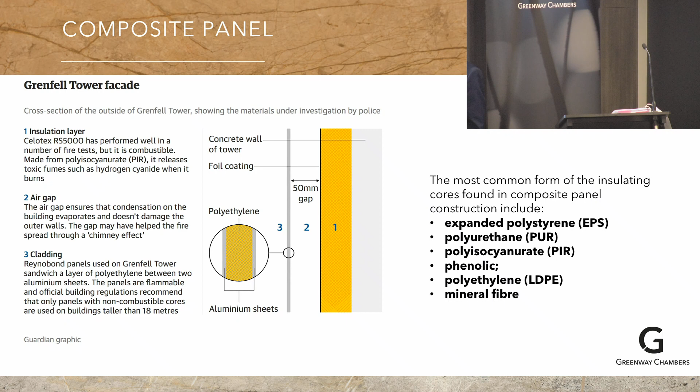And so the sandwich panel is this bit, has the two sheets, and inside you have the insulation or filler, which can be any of this. That's probably not combustible. I say probably for a reason I'll explain, but the rest of them, probably in order, are very combustible. And the combustion, polystyrene and polyurethane in particular, the use of that in building and in various uses, and the fire hazard that it presents has been well known for a long, long time. This is not new science.

I was looking at a Department of Labor report on the use of polyurethane in ships, which described the danger and the inherent fire risk, and the fact that if it caught alight, it was going to spread rapidly, producing very toxic gases, smoke, and the various difficulties. That was in 1989.

And while we're dealing with what we know, if designers had bothered to look at the literature, they would have discovered that as early as 1991 in the UK, there had been a couple of incidents, one in England, one in Scotland, of buildings that had been burnt and where the investigations had shown that cladding was implicated in the issue.

The Grenfell Tower really consolidated the view about cladding, but it was not by any means the earliest, and not by any means the biggest. It was certainly the most tragic because people lost their lives. But I'm going to show you just snippets of other fires, some of them very dramatic, involving the same mechanism. Mostly in Dubai, one in France, and the one, of course, that David will speak about, which is the LaCrosse building in Docklands in Melbourne.

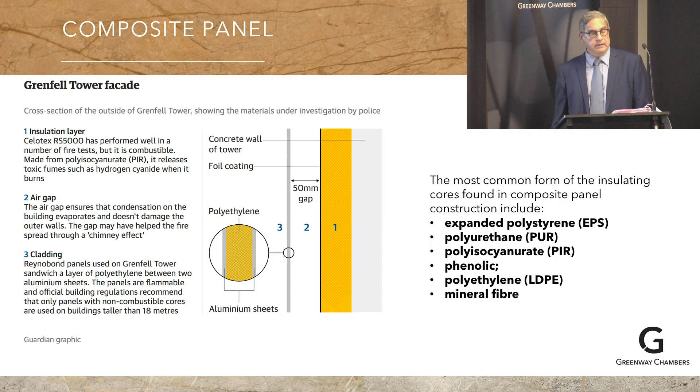Nath, these videos, can you just do something with this?

This is in October 2012, 5 years before the Grenfell Tower. It started on the fourth floor of a building. It's a Tamweel Tower. The characteristic burn is the same. You'll see it's burning on the outside. No one died. One would wonder whether that was by good luck rather than good management.

Nath, this is another one. T-Com Tower, again October 2012. Nathan. And you'll see bits falling off, which is the cladding as it disintegrates with the panels coming off. It's pretty significant because when designers design, they design for fire egress, and I'll deal with the particular issues, and we could go on and on.

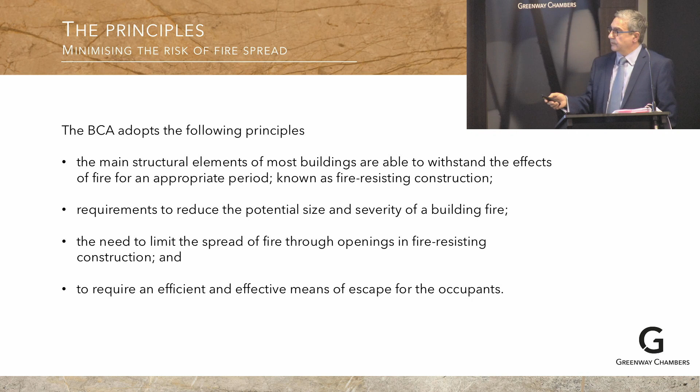The broad functional statements which you need to comply with, for example, CF1 requires a Class 2 building, and a residential apartment, multi-storey residential apartment building is a Class 2. I'll tell you why that's important in a moment. And it requires various safeguards. And there they are there. I won't read them, you can all see them. So they're the basic functional statements which you have to satisfy as part of the design.

In a very convoluted way, the BCA, by reference to Class 2 buildings, takes you to a table, and depending on the number of floors the building is, it tells you whether the fire requirements have to be a category A, category B, category C, and then it tells you where you find what the minimum fire requirements for a category building are. And clause 3.1 says this,

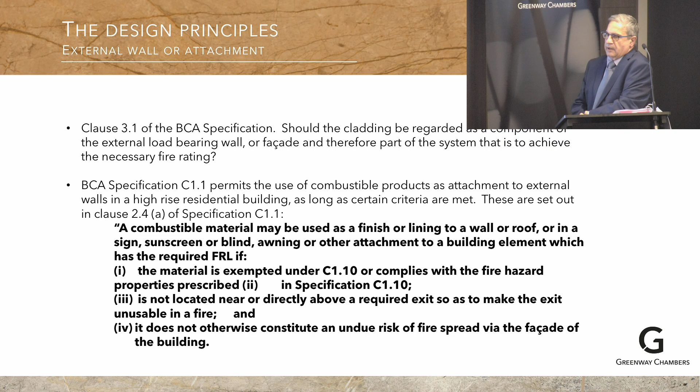Should the cladding in Grenfell be regarded as a component of the external load-bearing wall or facade and therefore part of the system? In other words, are people misconstruing this? And I'll indicate to you that they are. Why? Because the building code, as I've set out in bold on that slide, specification C1.1 permits the use of combustible products. They're defined, and I can assure you, aluminium cladding of the type we're talking about is a combustible product, as an attachment to external walls in a high-rise residential building, as long as certain criteria are met.

This one, which refers to C1.10, deals with testing, as to how you test the matrix and fabric of that material to ensure it is fire retardant. In other words, that it does not propagate fire. It's a panel that you test, and it's tested to a particular Australian standard, 1530.1. Look at this. This is the one that I'm interested in.

Just pause a moment with that last item. There are two really interesting things. Firstly, irrespective of the testing, it does not otherwise constitute an undue risk of fire spread, and the element seems to be distinguished from the facade. The terminology here seems to suggest that whatever this deals with, it deals with something attached which is not the facade. But this particular little baby is what developers, designers, those involved in passing buildings for construction have used to justify the attachment of decorative panels using combustible product.

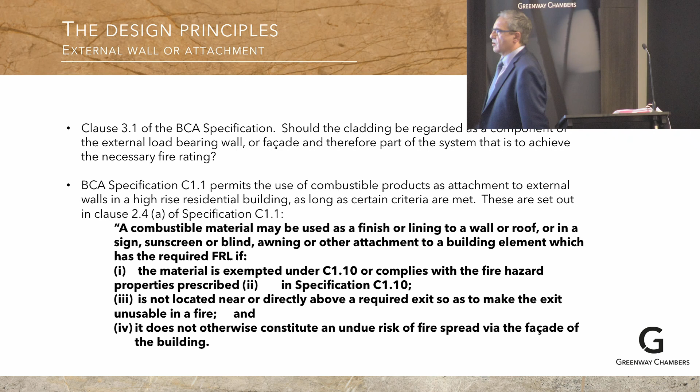But if you just pause there, assume that I'm wrong, and assume this is actually a provision of the code that allows the attachment of decorative panels to the exterior facade of a building, so long as, if they're combustible, C1.10 requires a particular form of testing. You're not getting that for imported product. Imported product isn't tested to Australian standard. If it comes from China, it's tested to Chinese standard. If it comes from Malaysia, it's tested to Malaysian standard.

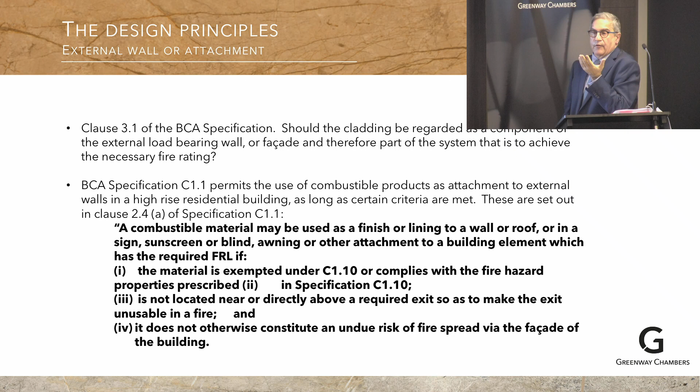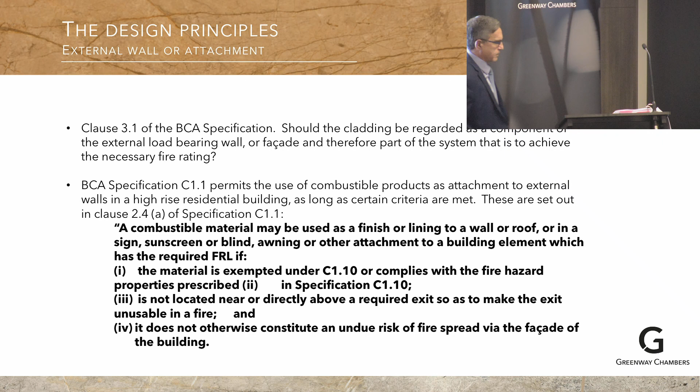And generally what's provided by the manufacturer is a certificate, which may or may not be authentic. That's a problem. Which may or may not actually certify that it's fire resistant. Which people may or may not understand, generally don't understand. And because they don't understand the code and the complexity of this code, they take a manufacturer's certification that the product is safe to use as an exterior cladding as being safe because it is either not combustible, if they even understand the concept of combustibility in this, or alternatively, that it's been tested and allowed.

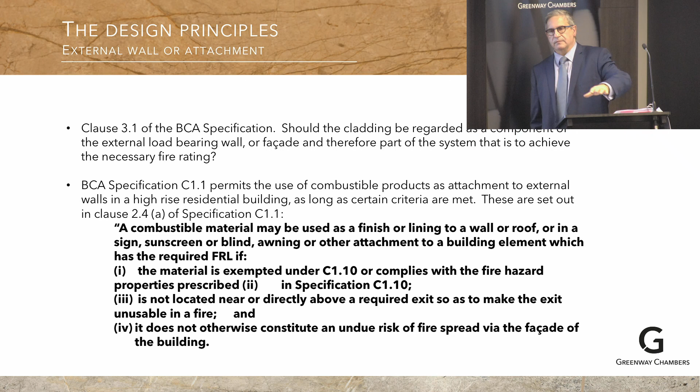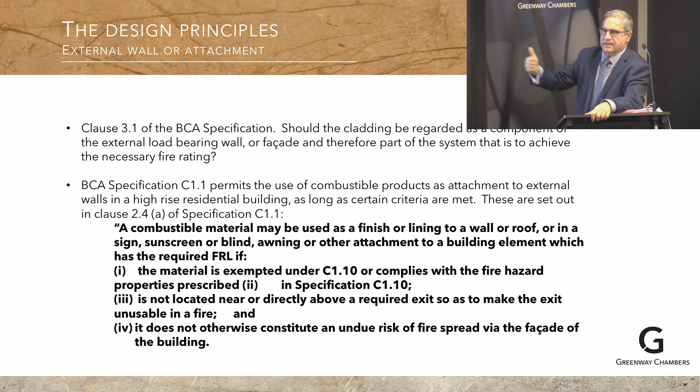Now it's this particular gap that building surveyors are really concerned about, because under the regulatory regime that we apply in New South Wales, David will speak about the Victorian system, a principal certifying authority cannot issue a construction certificate unless the building complies with the Building Code of Australia. Imagine how a building surveyor could possibly assess plans on their face that show a requirement for composite cladding to form a view as to whether or not it complies with the Building Code of Australia without asking for the testing, without forming a view about whether or not this is permissible.

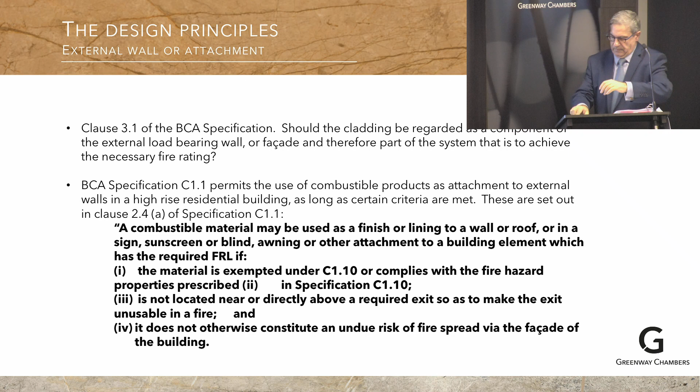And generally, people have done this in this way because they've got away with it. Let's be serious about it. It's been used this way for a number of years. The Grenfell Tower and other disasters, including the LaCrosse building, have woken people up, and the authorities are now looking at this very issue and determining whether or not people have been rorting this particular system. That's what it says. You saw the material falling off the building.

Problem is that in the design of buildings, as I've said to you, alternative solutions are usually part of the process, and alternative solutions in relation to the location of exits, fire exits, where they are in the building, usually involve an interplay of facade and exit, and often the alternative solution ignores or assumes the combustibility of the material complies. David's going to speak to you about that, and he'll speak to you about the Victorian legislation and give you some idea about the causes of action. I'll say a bit about that, the New South Wales view, in a moment. Dave?

Good evening, everyone. What I'd like to do tonight is to have a talk about the LaCrosse building, the structure and the parties that were involved in its design and construction, and then talk a little bit about the fire, how that occurred, and then talk about the events that followed the fire. There were steps taken by the regulatory authorities to deal with it. And then I'll touch on, as Franco said, some of the key legislation in Victoria. Pausing there, in Victoria at the moment, they are proposing a class action in relation to this, so hopefully some or all of you will be involved in that.

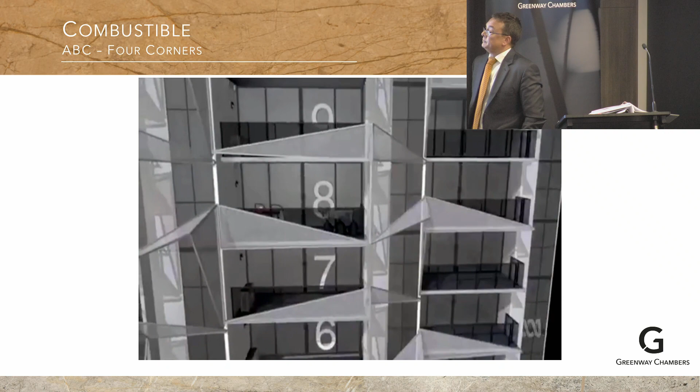On a working holiday, came home late, had a cigarette, and thought he put it out in a plastic container. We had outdoor furniture, we had lots of combustible items. The fire brigade made a graphic reconstruction. So we had, in this case, a table and chairs and lots of things around it. There's that panelling there. As we know from the fire investigation, there was a plastic yogurt container that was being used for cigarette butts. That started a fire onto the timber furniture.

Fire got in behind the air conditioning unit, and then the panel ignited. And with the ignition of the panel, we had flames shooting up the side. So the fire actually spread from one level to another and continued on up the building. This shows how the fire spread up the building from balcony to balcony.

What's really striking about it was actually the fire progression that progressed, up to...

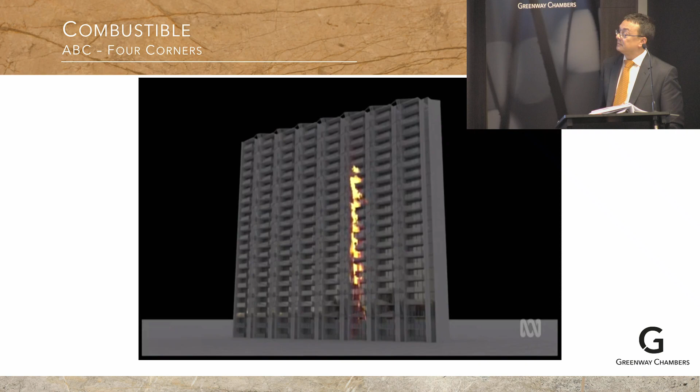Thanks, Dave. So, following the fire, in April 2015, the Metropolitan Fire Brigade prepared an incident report, and in doing so, went to the CSIRO and asked the CSIRO to perform combustibility tests. The relevant standard that Franco referred to, AS 1530, was employed. The product that was applied to this building had a PE composite which was 100%. There was no fibre or other fire retardant material in the ACP. It was 100% PE.

The product failed miserably.

Nath, if I could go to 2302. Sorry, Jean. Go back a frame. Do I need to do anything? Well, maybe we'll come back. We'll come back to it then if you can keep trying to locate it.

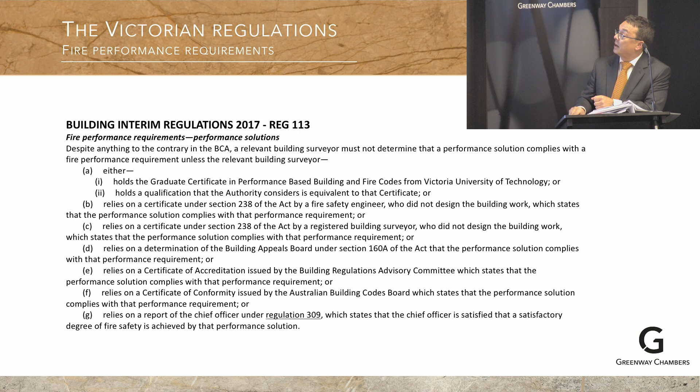Interestingly, the owners also make a claim under the Australian Consumer Law. The claim under the Consumer Law is in relation to a safety defect. Claim is under section 140 and 141 of the Australian Consumer Law. Broadly speaking, Section 7E of the ACL provides that the person is deemed to be a manufacturer if it imports the goods and the actual manufacturer, in this case the Chinese organisation, does not have a place of business in Australia. It's got to have a safety defect. That's governed by Section 9. I don't think there's any doubt that the goods had a safety defect. And then Section 140 and 141 go on to say that there's to be an entitlement to compensation if that safety defect in the goods causes damage to either other goods, Section 140, or to buildings, Section 141.

In response to that claim, L.U. Simon says, we didn't import it and we're not a deemed manufacturer. They go on to say that it's not a safety defect. See paragraph A, this stuff's been used for the last 40 years. And it denies that it's caused the loss and damage and points the finger to the other respondents.

Claims against the surveyor, claim made in negligence. There's a duty of care pleaded to avoid economic loss. Interestingly, the pleading is quite deficient in the way it goes about articulating how a duty of care arises in these particular circumstances. It's merely asserted that a duty of care is owed pursuant to the principles in the Victorian Supreme Court of Appeal case of Taitapanui, which established that a surveyor had a duty of care in the circumstances in that case. More particularly, the allegation against the surveyor is that he's negligently issued a building permit in circumstances where the design documentation did not meet the requirements, and that the surveyor has caused the loss and damage by giving approval for the design documentation and failing to require that the design documentation complied with CP2 of the BCA.